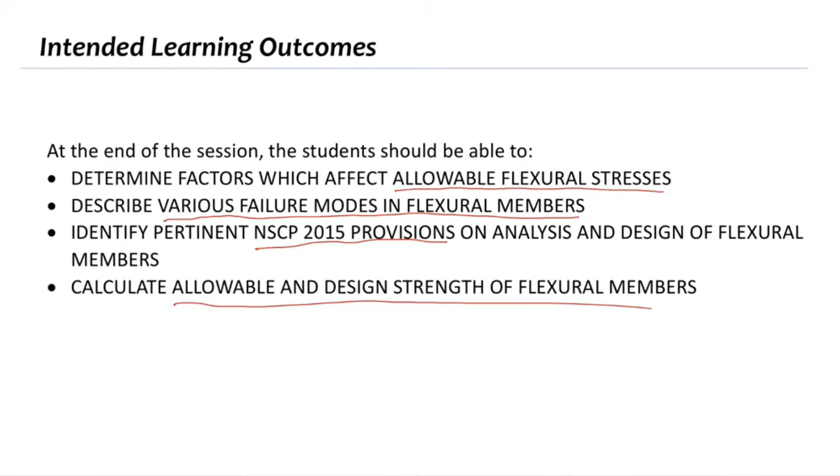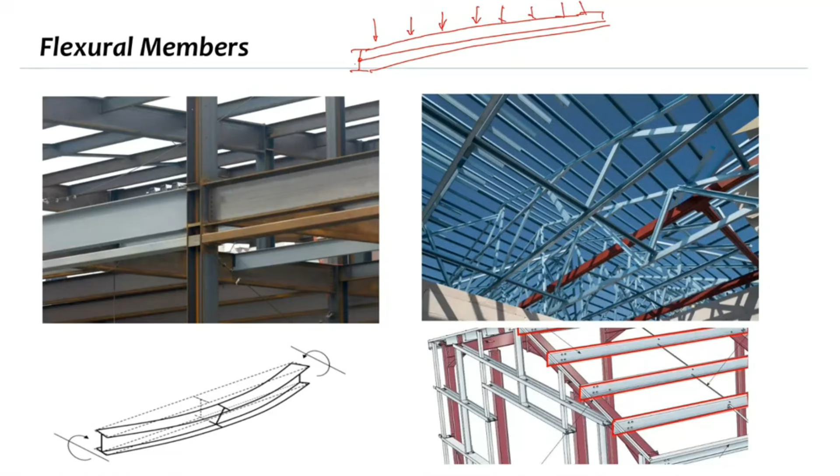Flexural members are members that carry gravity or downward loading along its longitudinal axis. So if this is our member, an I-section, and that is the longitudinal axis, it carries downward loading along its longitudinal axis. Because of that loading, we have bending - our element bends, which causes what we call internal moment. So because of the downward or gravity loading along its longitudinal axis, we get internal moment.

That is why when we have a beam, we have what is called a moment diagram, especially if the element is carrying gravity loads along its longitudinal axis. At any point of this beam, if I cut a section here, I will see an internal moment - we have an internal moment being carried. Usually, when simply supported, the compression is at the top and tension at the bottom. So that is a common analysis of a flexural member.

So what are those flexural members? Of course, the main example is the beam, because our beams are actually carrying gravity loading coming from our slab. So coming from the slab, going to the beam, our beam carries gravity loading, and because of that gravity loading, our beams bend.

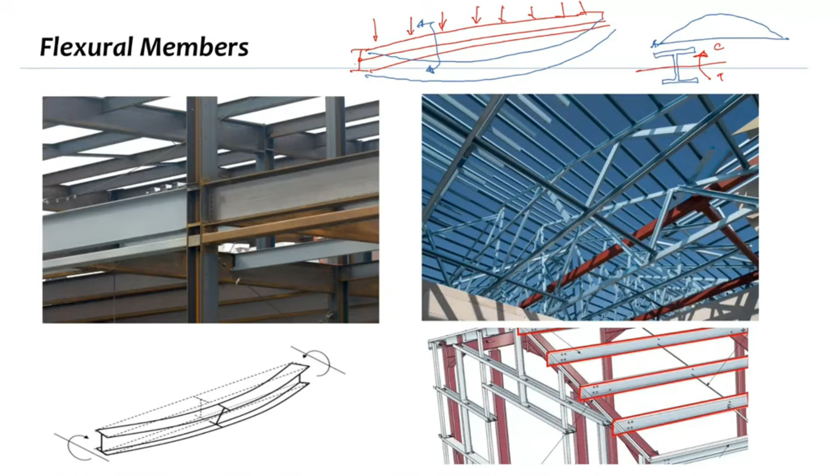Another example of our flexural members is our purlins. Purlin is commonly designed as a flexural member. Maybe it's not obvious, but what is that? That is also a flexural member, because if we look at our purlin, which supports the roof sheets, when it carries wind load or any loading, the load is actually perpendicular to its longitudinal axis. That will cause bending as well, so there's also bending when it comes to our purlins.

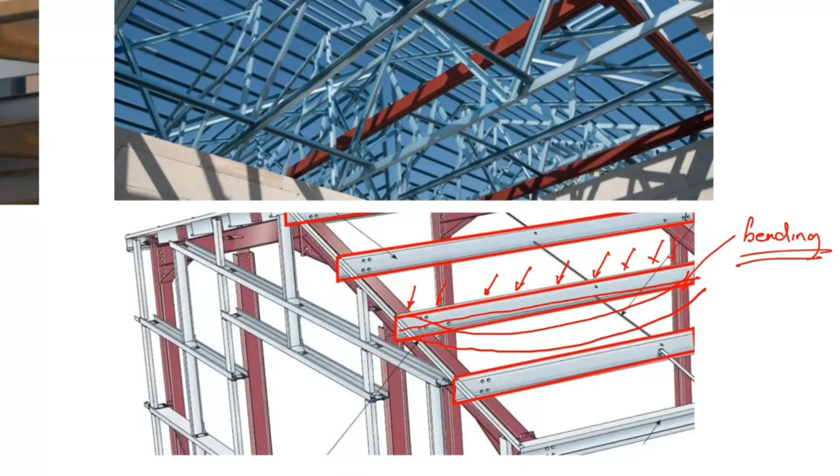But beams are the most common example of a flexural member, because when we are designing a building, that is the main flexural member element we design. These are structural elements that carry gravity or vertical loads subjected to primary flexure or bending, and they are typically oriented horizontally - our element is horizontal so it can carry gravity load. So the common sections used in our beams are wide flange or W shapes.

But sometimes channels or built-up members are also used, especially for small structures like a one-story parking garage. We can also use purlins there, but the orientation of our purlins should actually be standing, because when our purlins are standing, the moment of inertia is larger, giving greater resistance to bending.

As we discussed, the higher the moment of inertia, as the moment of inertia increases, the higher the resistance to bending. The higher the moment of inertia, the higher our resistance. But sometimes we can also use built-up shapes, if we are limited on the size of the elements. Built-up sections are used when we want to increase the strength of a member without really changing the size of the elements or the size of the member.

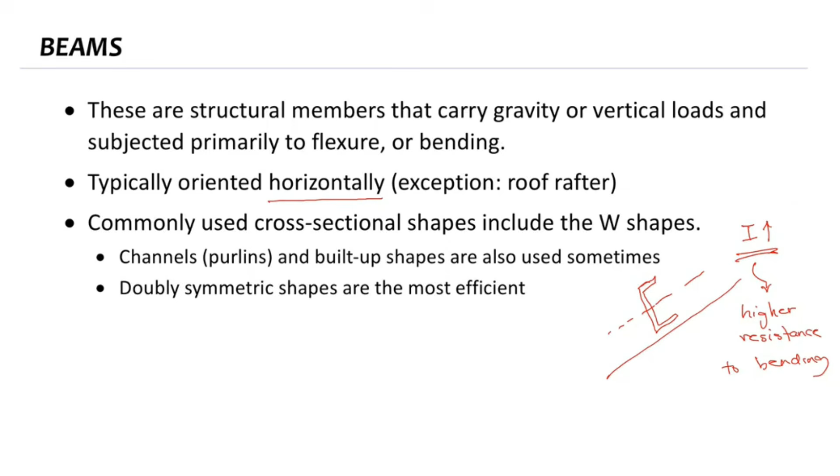Doubly symmetric shapes are the most efficient because, being symmetrical shapes, we already know that the principal axis or major axis will be along the x or y axis. That's why we commonly use I-shapes, because they are doubly symmetric shapes.

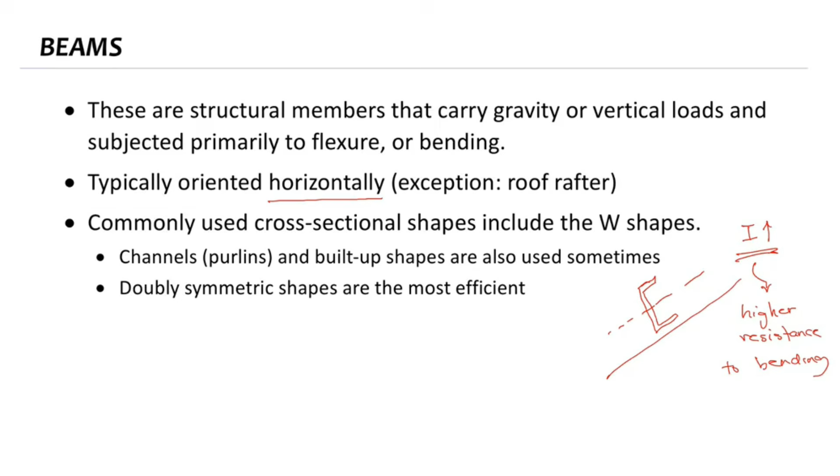If we want to calculate the bending stress of our flexure members, we use a simple formula from mechanics: MC over I, where M is the moment applied, C is the distance from the neutral axis to the extreme fiber, or the distance from the neutral axis to the point in question, and I is the moment of inertia.

But we already established in lecture number 1 that our section modulus, or Sx, is equal to I over C. That is why we can also define the bending stress as equal to M over S, or the applied moment divided by the section modulus, where S is the section modulus.

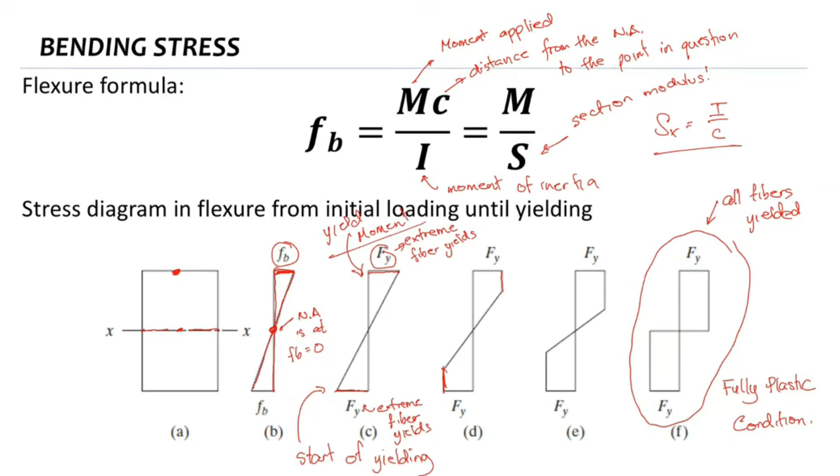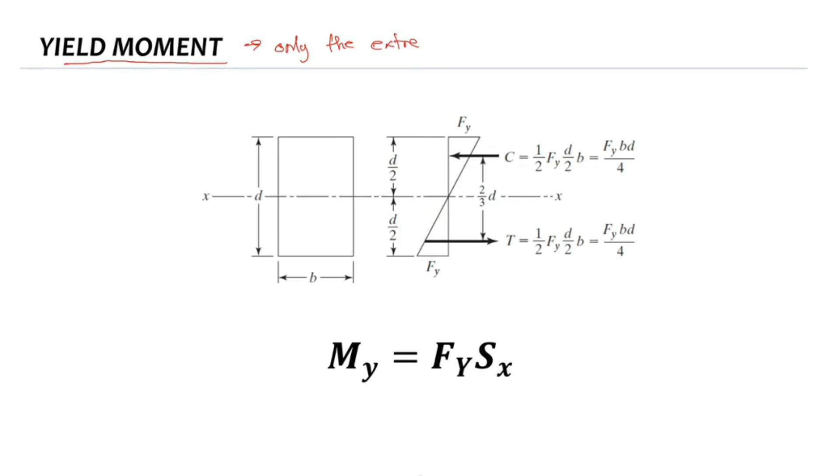So if we look at the yield moment, to calculate the yield moment capacity, this is where the yield moment happens—when only the extreme fiber has yielded. If we look at the stress distribution, it will be triangular.

We have a triangular stress distribution, with compression at the top and tension at the bottom, because only the extreme fiber yielded. If we calculate the compression force, it will be the volume of the stress diagram, which is a triangle—that is 1/2 times the stress Fy times the area, where the area is half of the section, BD over 2.

The same applies on the other side. This gives us Fy times BD over 4. Similarly at the bottom, since compression equals tension, the bottom will also be Fy times BD over 4.

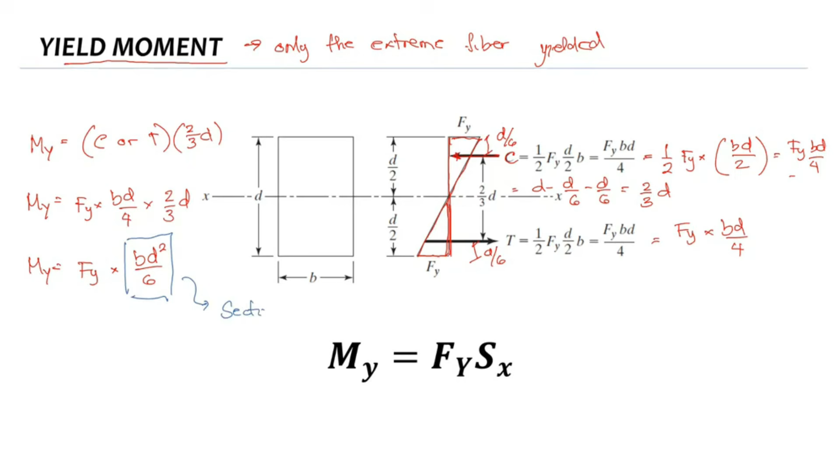This BD squared over 6 is actually our section modulus, the elastic section modulus. The elastic section modulus Sx is just equal to I over C, where I, the moment of inertia of a rectangle, is just BD cubed over 12. So that is BD cubed over 12 divided by C, which is D over 2. This will be BD squared over 6. So they are the same, parehas lang.

So basically, we don't have to do the force analysis when we want to determine the yield moment. If we want to determine the yield moment, we just multiply the yield stress with the elastic section modulus. To get the yield moment, you just multiply Fy by Sx. That is the yield moment.

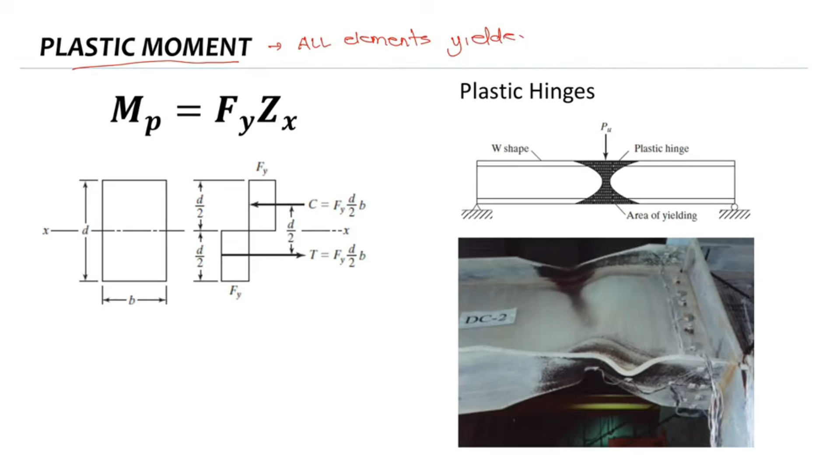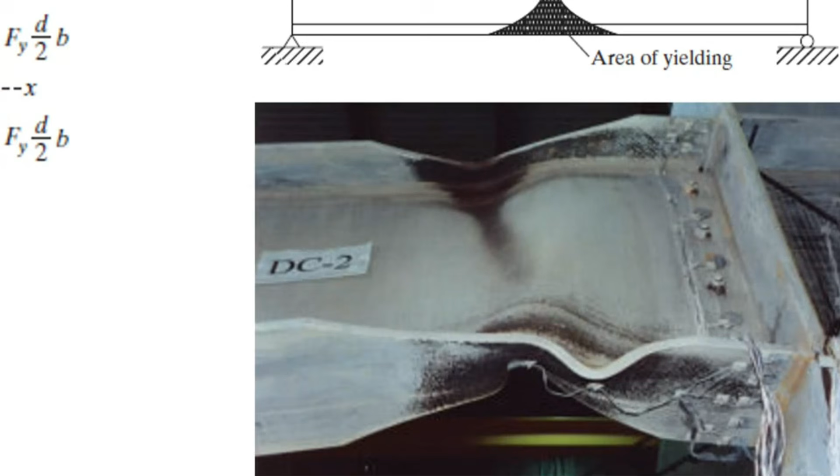On the other hand, if we look at the plastic moment, when we say plastic moment, all the elements already yielded, all elements or fibers already yielded. When all the elements or fibers have yielded, that is what we call the full plastic condition. So when we have full plastic condition, this is what it looks like, not just the extreme fiber yielded, but all fibers along the depth already yielded.

So in full plastic condition, all the stress is not linearly varying anymore, unlike in yield moment. In plastic moment, it is now constant stress of Fy, because everything has already yielded. We have a constant stress of Fy.

So in such cases, if we are going to do a force analysis, the compression will be just the stress times the area. The area now is no longer a triangle, it's a rectangle. So the compression is just equal to Fy times the area of half of the rectangle, that will be BD over 2. It's also equal to the tension, and the location of the force will be at 1/2 of D over 2, so that will be D over 4 on each side. So the distance between compression and tension will be D over 2.

To calculate for the plastic moment, same as what we did earlier, compression or tension multiplied by the distance between the forces. So the plastic moment is equal to compression or tension times the distance between them, that's D over 2. So the plastic moment equals Fy times BD over 2 times D over 2, which gives us Fy times BD squared over 4.

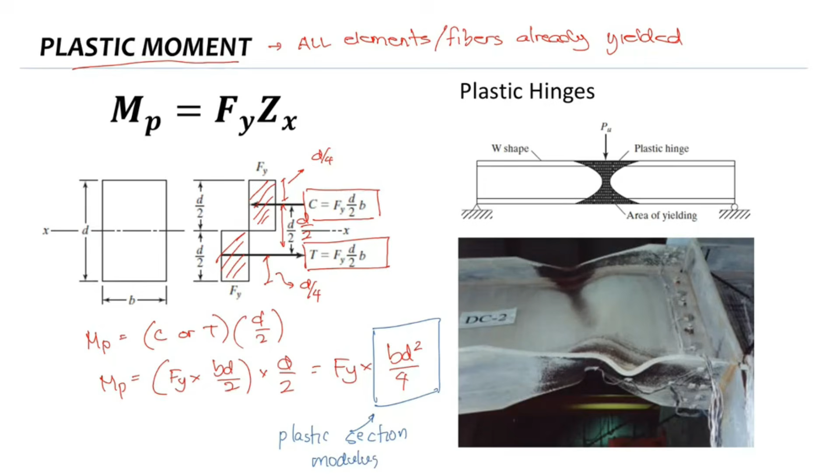So earlier we called it elastic section modulus. This time, this is what we call the plastic section modulus. Earlier, for the elastic moment or yield moment, our designation was Sx. This time, our designation is Zx, the plastic section modulus.

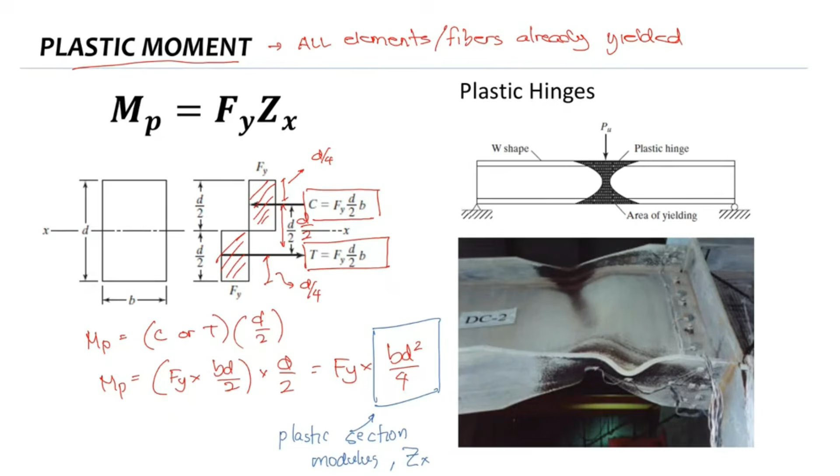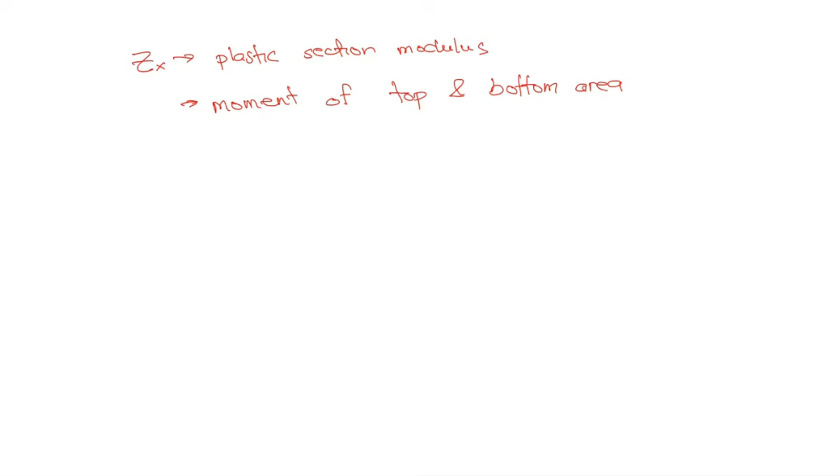So what is the plastic section modulus? Plastic section modulus is actually the moment of area of the top and bottom about the plastic neutral axis. Let's discuss what plastic section modulus is. Plastic section modulus or Zx, that is what we call the plastic section modulus. It's actually the moment of top and bottom area - not just one part, but top and bottom - moment of top and bottom area about the plastic neutral axis.

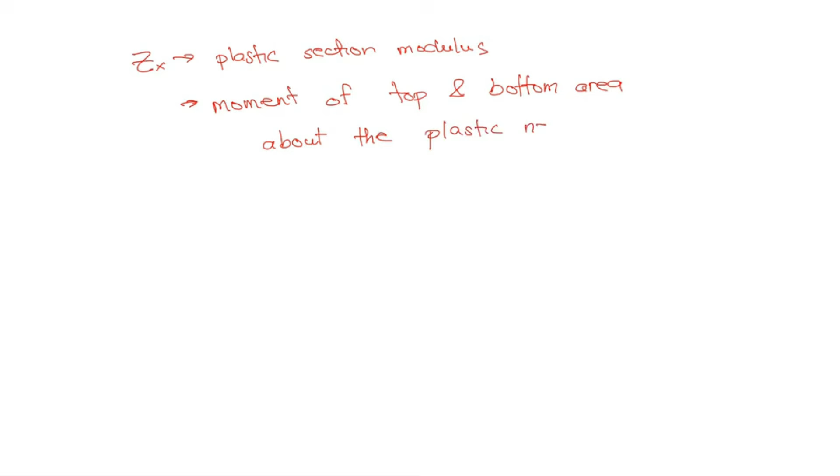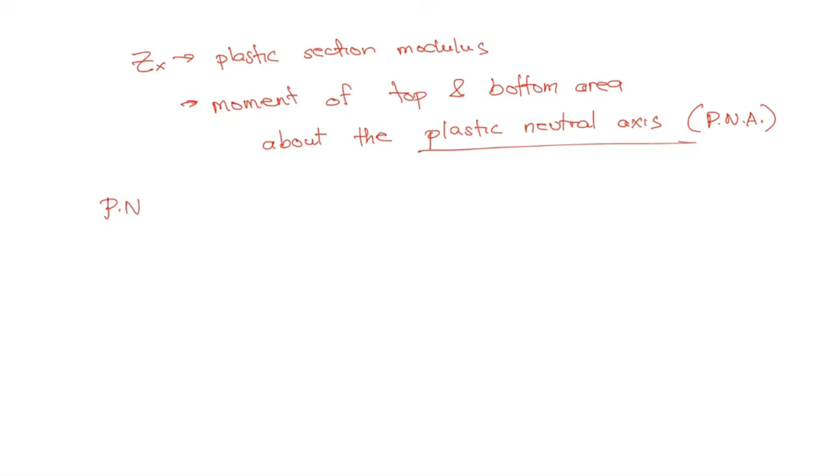Or yung tinatawag natin na PNA, plastic neutral axis. Ano naman yung plastic neutral axis? Basically, ang plastic neutral axis is actually the division of the compression and tension zone.

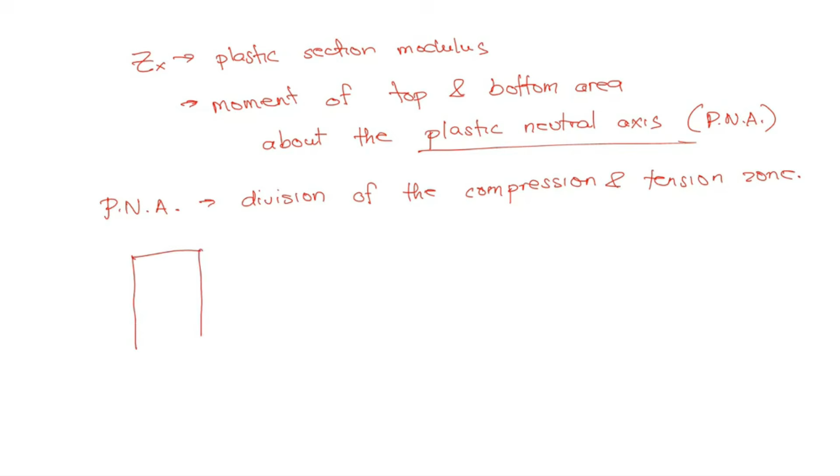This is actually the neutral axis that you are considering when you are calculating a reinforced concrete problem. Sa reinforced concrete, kung meron kang section na may steel sa ilalim, meron kang compression sa top, tension at the bottom, tapos kinukuha mo yung depth C, yan daw po yung neutral axis. So, the neutral axis sa RC, yan din yung neutral axis natin sa steel. Basically, that is the division of the compression and tension zone.

Kapag na-consider naman natin ang steel element, let's say this is our steel element, then the division of the compression and tension zone, this is compression, this is tension, ito po yung neutral axis natin. That is still the neutral axis. So para ma-locate natin yung neutral axis, what we can do is equate compression is equal to tension.

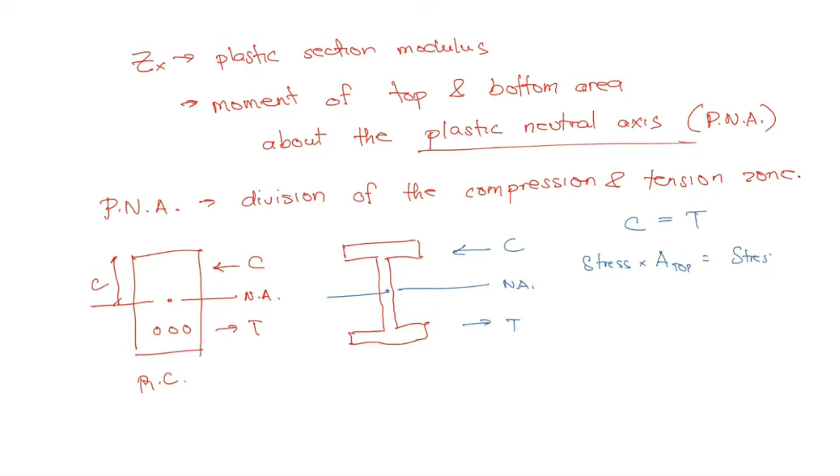Ganyan din yung ginawa natin sa RCD. If we equate compression is equal to tension, then that will be the stress times the area. Stress times area top is equal to stress times area bottom. Pero yung stress natin, dahil plastic siya, ang stress natin Fy. So Fy times area top is equal to Fy times area bottom, kasi parehas po yung steel sa top and bottom. So in that case, magka-cancel po yung ating Fy kasi parehas lang naman sila. So that means area top is equal to area bottom.

So for steel design, the location of the plastic neutral axis is actually the division of the top and bottom area that will make it an equal area. So we can add another definition for plastic neutral axis: for steel design, or basically for steel with uniform Fy, the plastic neutral axis is just basically the axis that divides the area into two equal areas.

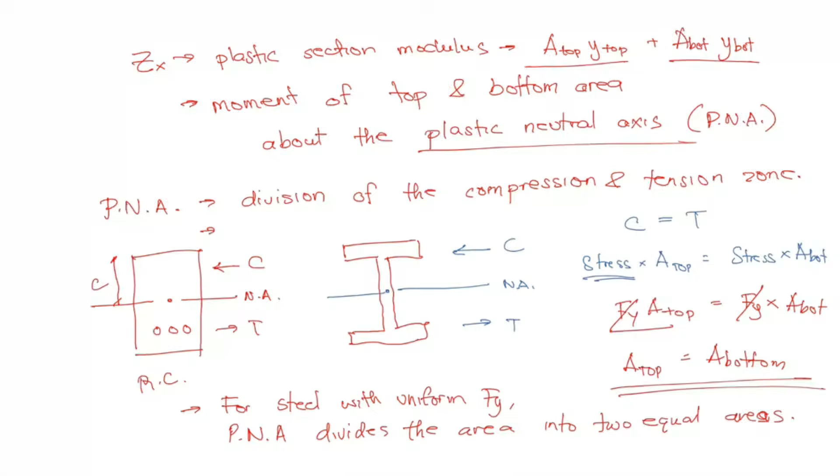So, shape factor is the ratio between the plastic moment and the yield moment. Again, shape factor is the ratio of plastic moment MP and yield moment My. We already established that the yield moment is equal to Fy times Sx, and the plastic moment is Fy times Zx. So to calculate for the shape factor, it's just equal to the plastic moment over the yield moment. Since they're both Fy, magka-cancel po yung Fy natin, that will be Fy Zx over Fy Sx. Cancel Fy, shape factor is just equal to Zx over Sx.

So what does the shape factor tell us? Pagka shape factor po, let's say the shape factor is always greater than 1. So let's say the shape factor is 1.5. That means after yielding, at the start of yielding, it can yield 50% more before it reaches full plastic condition. Yun yung sinasabi ng shape factor. So let's say, for example, the shape factor is 1.5, then after yielding, once it starts yielding, it will yield 50% more before it reaches full plastic condition. That is what we call the shape factor.

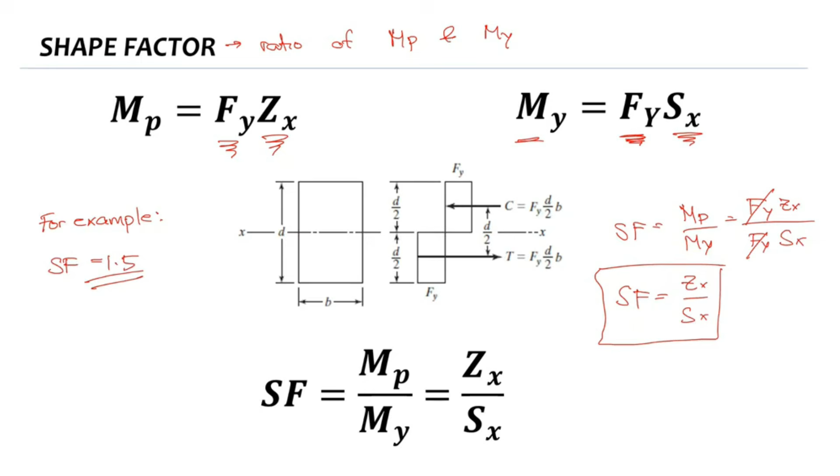Shape factor is always greater than 1 since plastic moment is greater than the yield moment. Yung plastic moment natin is greater than the yield moment. So dahil mas malaki yung numerator with respect to the denominator, then it should be greater than 1.

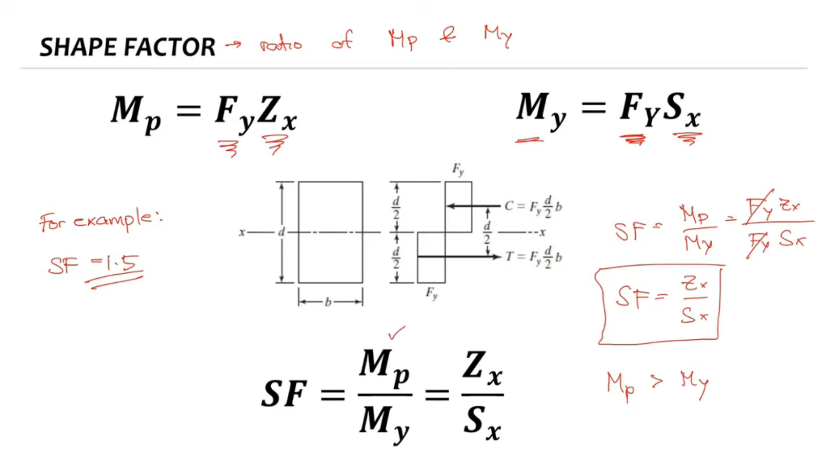Now let's apply the concept to a simple example. We have to calculate the elastic section modulus and the plastic section modulus, as well as the shape factor.

Letter A, we have a rectangular section with a base of 50 and a depth of 200 millimeter.

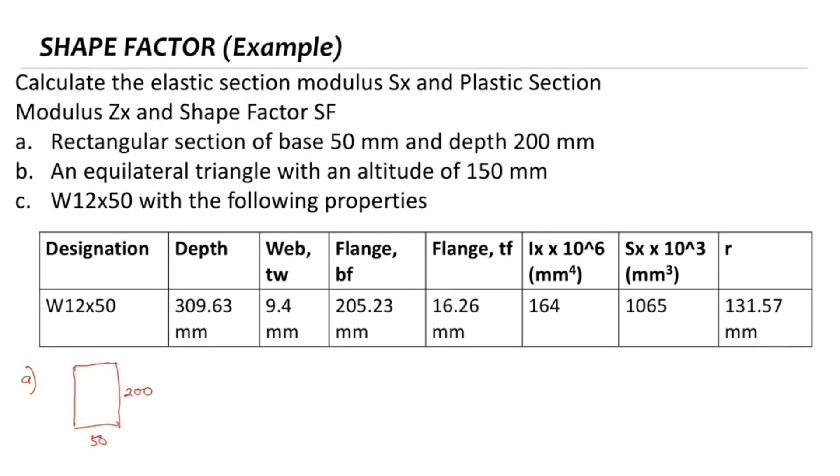If I want to calculate the section modulus Sx, section modulus is equal to Ix divided by C. Our Ix is the base 50, height 200 cubed, over 12, divided by the distance from the extreme fiber, distance C, which is 200 over 2. So what is Sx? That is 333.333 times 10 raised to 3 millimeter cube. So this is our Sx.

To solve for the plastic neutral axis or the plastic section modulus Zx, take note that for a symmetrical section - meaning a section we can fold - the centroid and the plastic neutral axis coincide with each other. The plastic neutral axis, PNA, is at center. So when the section is symmetrical, the plastic neutral axis is just at the center. If it can be folded, then the PNA will be at the center. So for this rectangular section, we don't have to worry because this is a symmetrical section, so the plastic neutral axis is at the center.

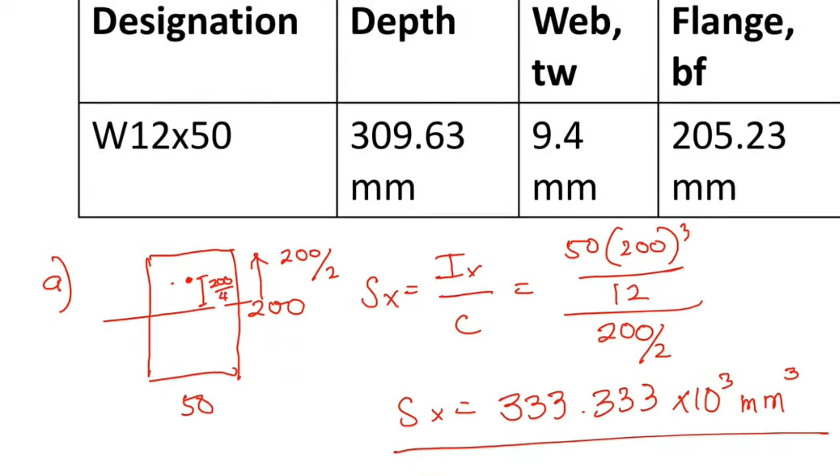So to solve for Zx, we just have to take the moment: area top times y top, plus area bottom times y bottom. Our area top will be 50 times 200 over 2. How far is the centroid of y top from the plastic neutral axis? That is 200 over 4. So times 200 over 4. And since the top is equal to the bottom, I'm just going to multiply this by 2, because the top and bottom are actually equal. So I can now calculate for Zx. What is our Zx? 500.

Solving for the shape factor for the rectangular section, the shape factor is equal to Zx over Sx. That is equal to 500 times 10 raised to 3 divided by 333.33 times 10 raised to 3. What is our shape factor? 1.5. The shape factor is now 1.5.

Next, for an equilateral triangle with an altitude of 150 millimeter. So letter B, we have an equilateral triangle, meaning all sides are equal, with an altitude or height of 150 millimeter. Since this is an equilateral triangle, this is also equiangular, so each angle is 60 degrees.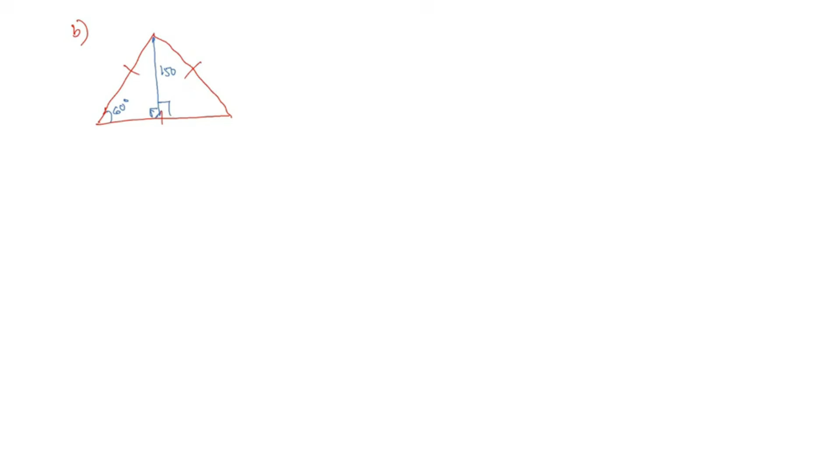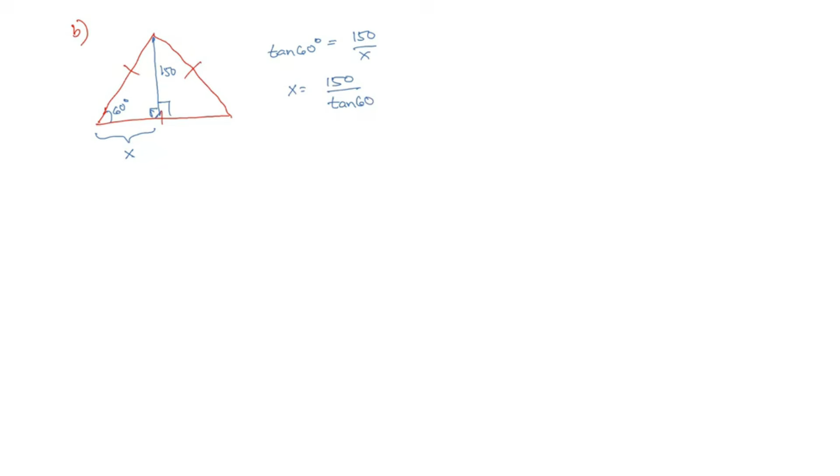To get the base, let's say this distance is x. Tangent of 60 degrees is equal to 150 over x, so x will be equal to 150 over tangent 60. But since there are two of these, 2x, our base is equal to 2x, which is 300 over tangent 60.

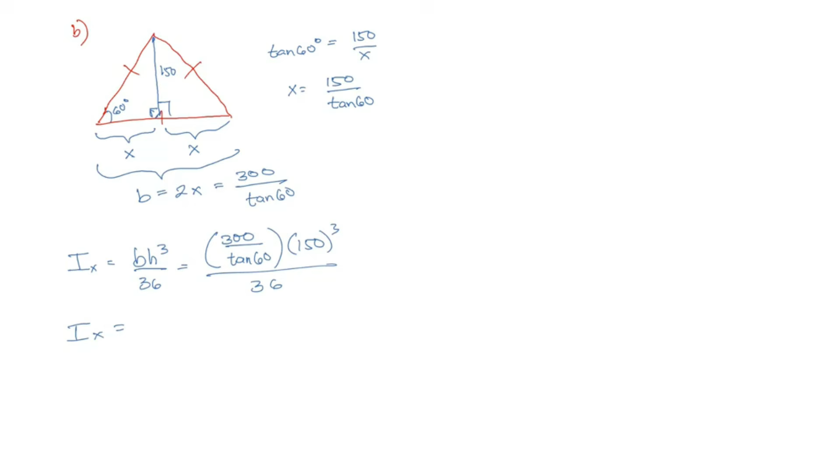So in solving the moment of inertia, it will be bh cubed over 36. Ix will be equal to bh cubed over 36. Our base is 300 over tangent 60, our height is 150 cubed, over 36. That will be our Ix. What is our Ix? 16.238 times 10 raised to 6 millimeter to the fourth.

Calculating for Sx is equal to Ix over C. Our C, coming from the elastic neutral axis, is 2/3 of the depth. So that is 16.238 times 10 raised to 6 divided by 2/3 of the depth, 150. What is our Sx? The result is the same, because it's 100. So that is 162.38 times 10 raised to 3 millimeter cube.

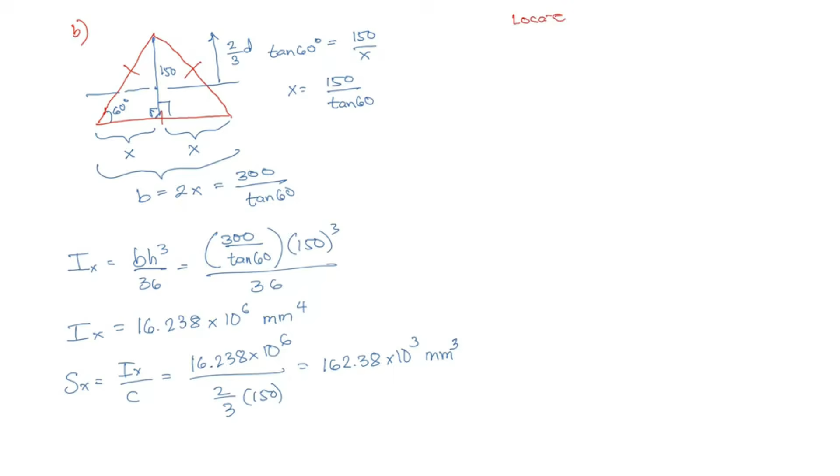To solve for the plastic section modulus, we have to locate the plastic neutral axis. But this time, the plastic neutral axis is not at the center because this is an unsymmetrical section. So we have to locate the plastic neutral axis by equating the top and bottom areas.

So let's say the location of the plastic neutral axis is at depth y, and this is z. To locate the plastic neutral axis, recall that it divides the section into two equal areas. So to solve for y, area top will just be equal to area bottom. Area top natin, that will be equal to 1 half...

z times y is equal to the area bottom. Ang area bottom natin is the area of the trapezoid, no? This is a trapezoid section. But the base is actually 300 over tangent 60, and the depth is now equal to 150 minus y. So we can calculate the area of a trapezoid: 1 half, B1 plus B2, average of the bases, times the height. So that will be 1 half.

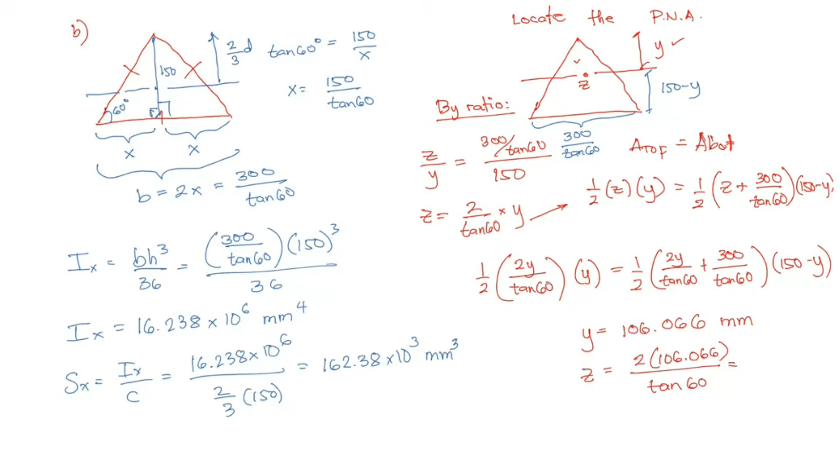With this, I can also calculate for z. The z value will be 2 times 106.066 divided by tangent 60. That is equal to ilan? 122.474.

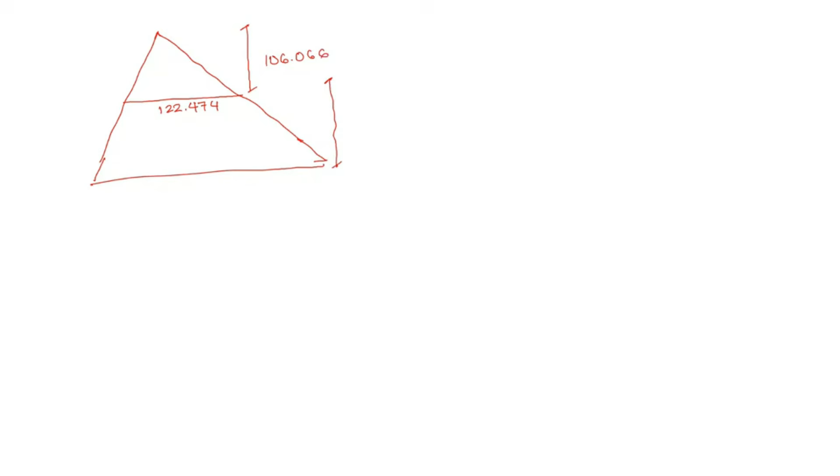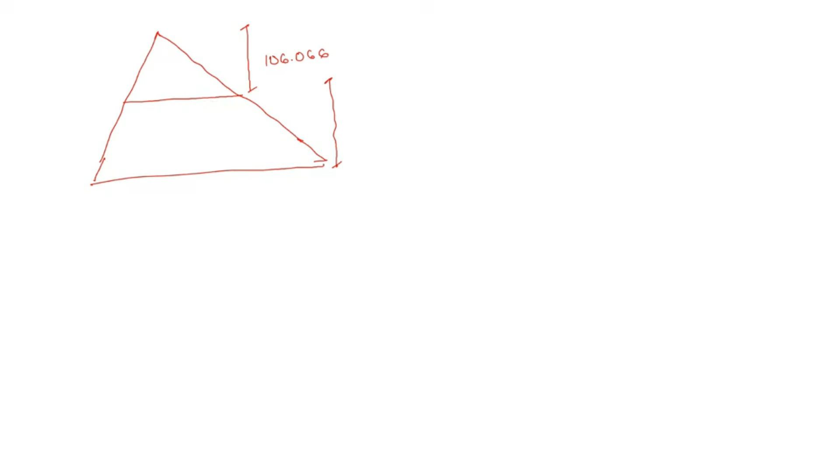122.474. So with this, I can calculate for the plastic section modulus. So the base is actually equal to 122.474, and the height is actually equal to 106.066. So for this one, that is actually equal to 150, or we can just stick with the variable and substitute later on, kasi may mga value naman na tayo. So this is z, this is y, this is 150 minus y, this is 300 over tangent 60.

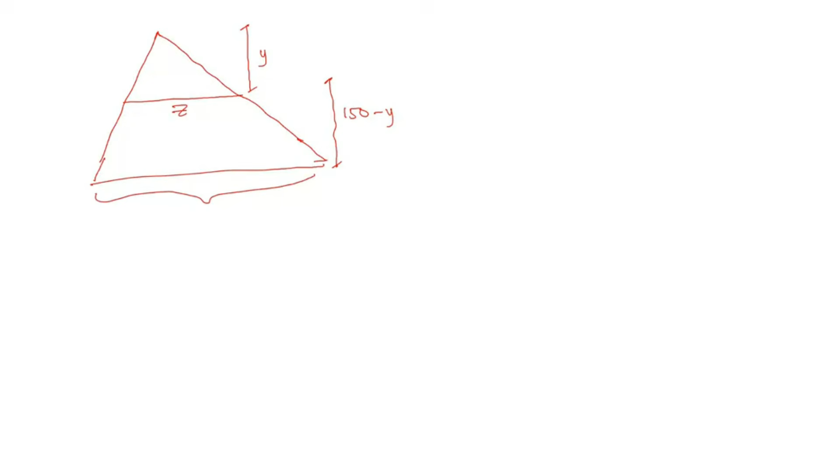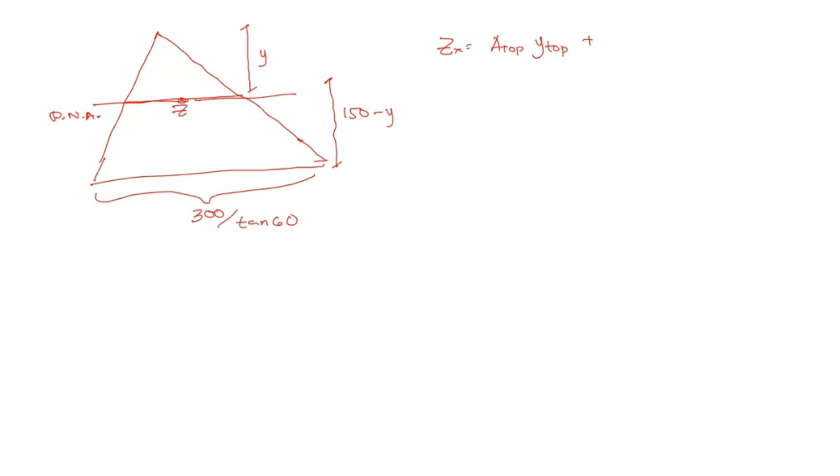So we are going to take the moment from the plastic neutral axis. Let's say this is the plastic neutral axis. So i-moment lang natin. So Zx is equal to area top, y top, plus area bottom, y bottom. Ang area top natin, that is equal to the triangle, that is 1 half z times...

1 half z times y, times the distance, that is y over 3. That is the moment of area for the top.

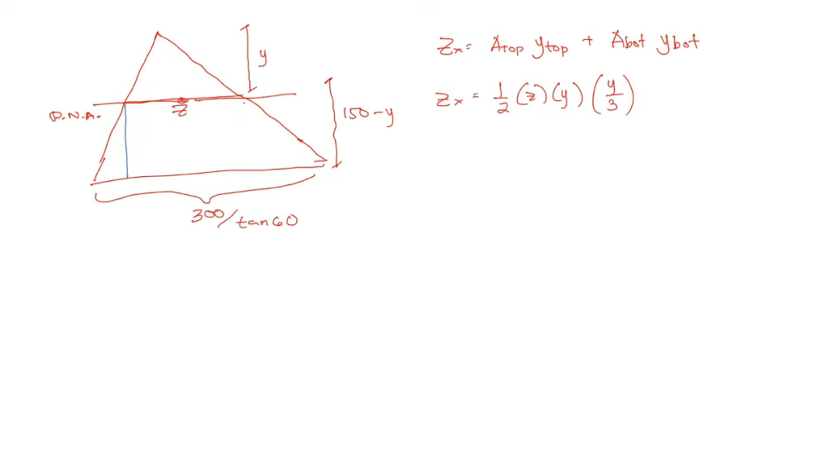And then for the area bottom, hatiin natin siya sa dalawa, gagawin nating isang rectangle saka triangle, isang area 1 saka area 2. So plus yung area 1, the rectangle, that will be base z, times height 150 minus y. That is the area, z times 150 minus y, and then the distance, that will be 150 minus y divided by 2.

Plus area 2, area ng triangle, 1 half. Ang base natin will be 300 over tangent 60 minus z, that is the base. Ang height natin, 150 minus y. Tapos yung distance from the neutral axis, that will be 2/3 of 150 minus y. Okay? Then you can now calculate for Zx.

Substitute the value. Ang Z natin, the Z is equal to 122.474. And then yung Y natin, Y is equal to 106.066. Can you solve for Zx?

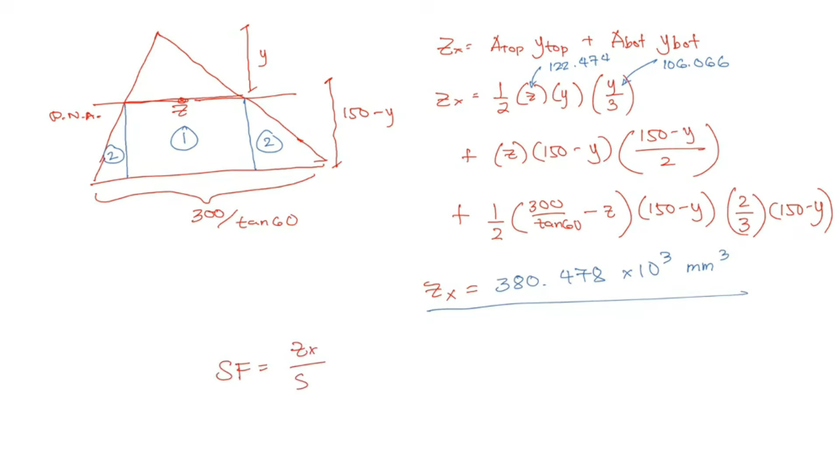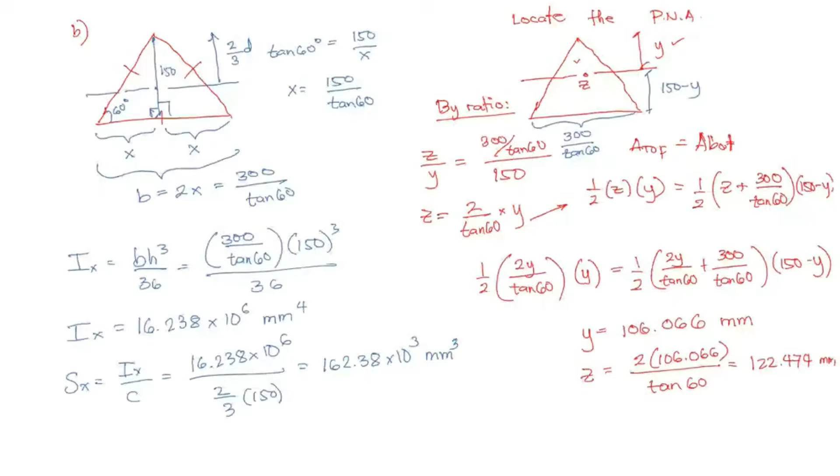After solving for Zx, we can now calculate for the shape factor. Ang shape factor natin is equal to Zx over Sx. That is 380.478 times 10 raised to 3 over Sx, that is 162.38 times 10 raised to 3. What's the shape factor? 2.34.

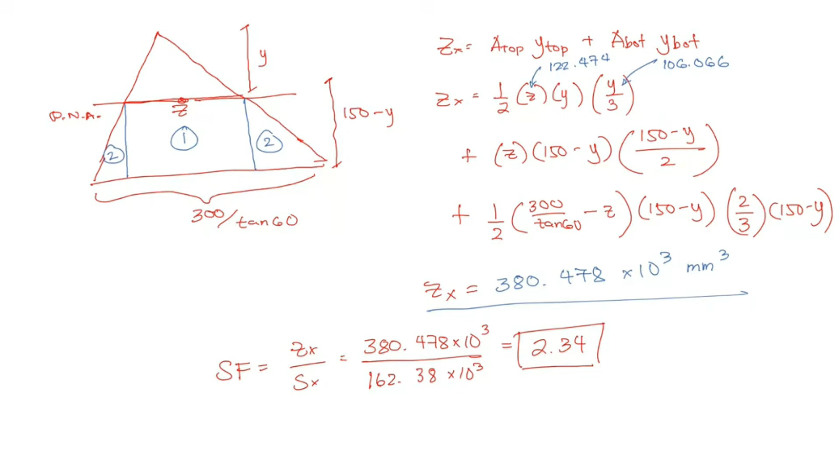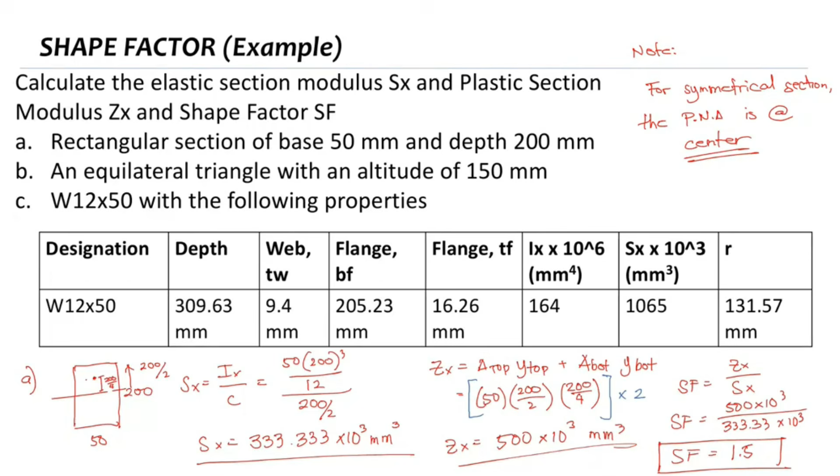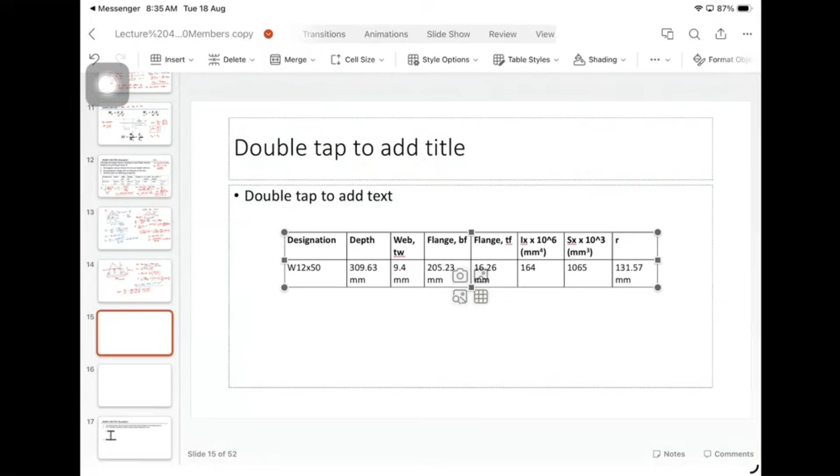Okay, so that is for the equilateral triangle. Lastly, let's try to solve for the W12 by 50. For the W12 by 50, we have the following properties. So to solve for it, let me copy this. For the next one, we have a W12 by 50. We already have the dimension and we already have the Sx. So ang isolve na lang natin Zx. We just have to solve for Zx.

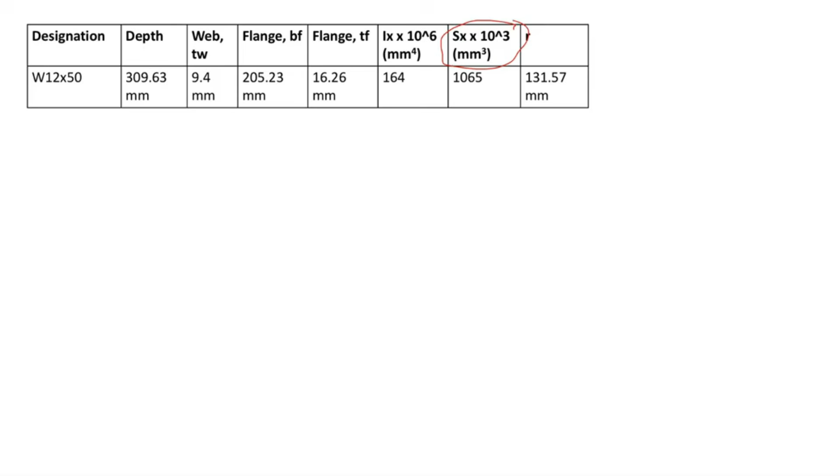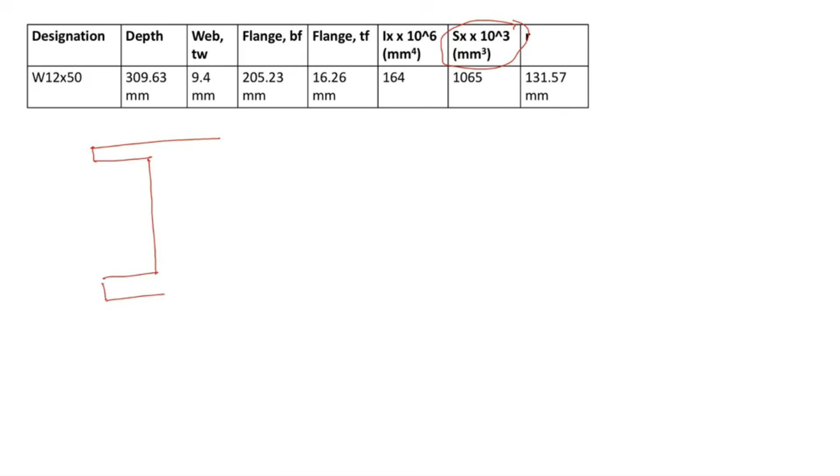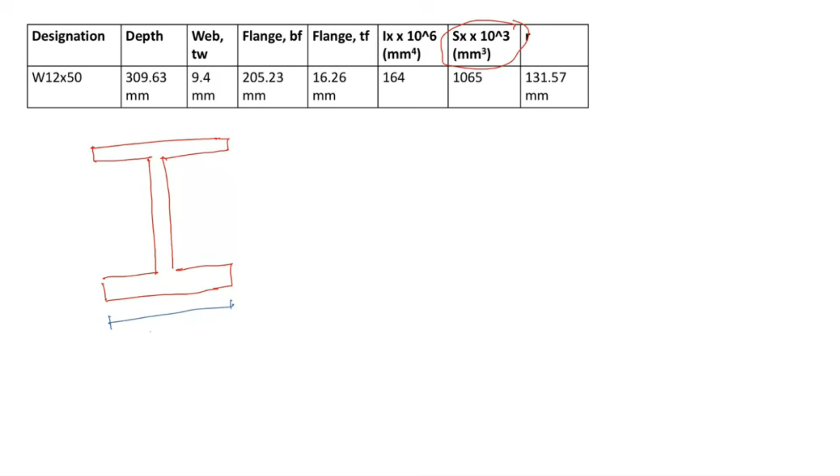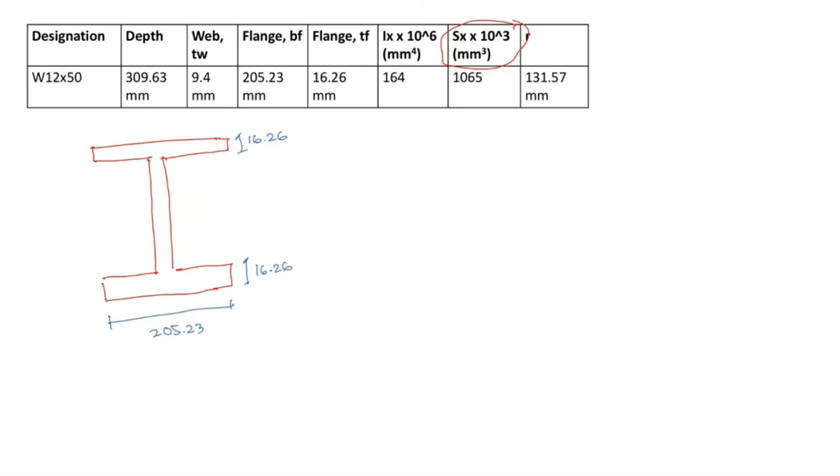So to solve for Zx manually, let me just draw the I section. Drawing natin yung I section. And the base or the flange width is 205.23. The thickness of the flange is actually 16.26. And the total depth is 309.63. So I can now determine the depth of the web. Let's say this one, H, that is equal to 309.63 minus 2 times 16.26. Ilan po ito? 277.11.

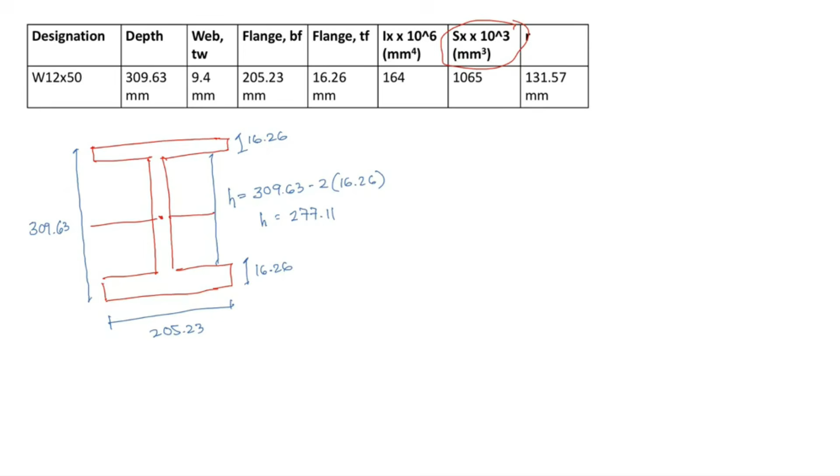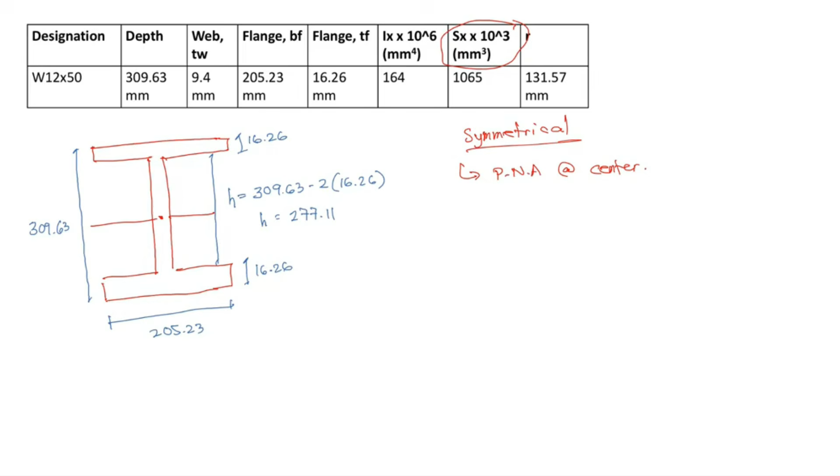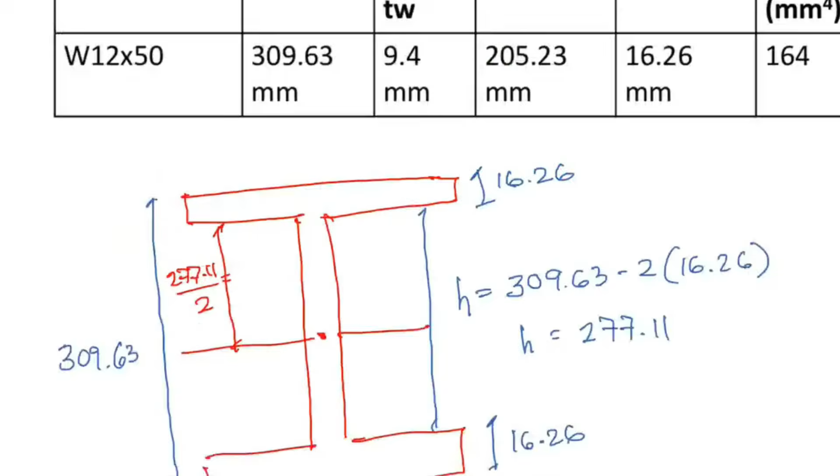So if I'm going to calculate for the plastic section modulus, since this is a symmetrical section, then the plastic neutral axis will be at center. Nasa gitna lang yan, no? Plastic neutral axis at center kasi symmetrical po siya. So I can just take the moment of the top and bottom. So I could also determine this. Can you get me this? 277.11 divided by 2, that is 138.555. So to calculate for Zx will just be equal to area top, Y top, plus area bottom, Y bottom.

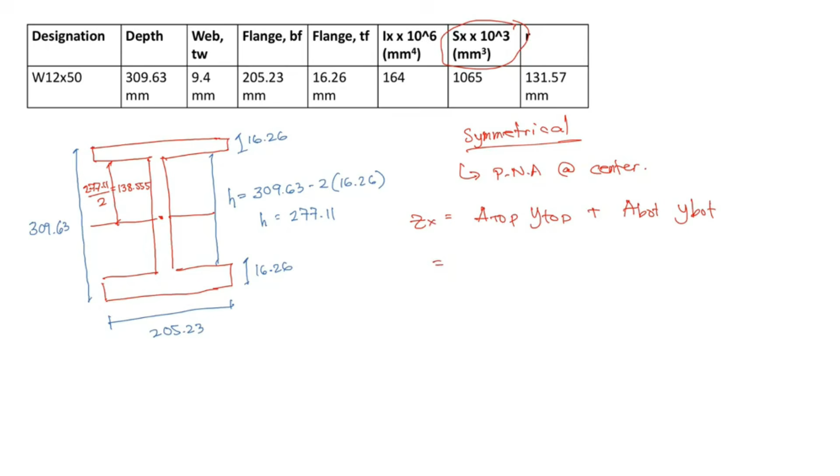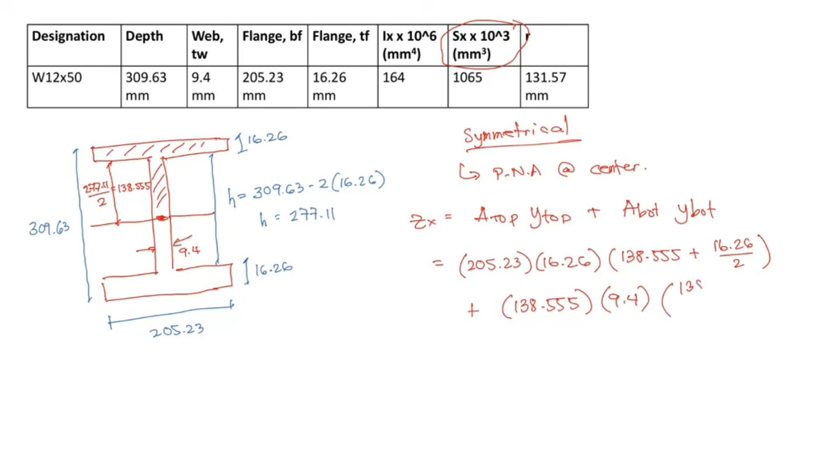Ang area top natin, flange muna for this one, that is 205.23 times 16.26 times y top, gaano siya kalayo sa plastic neutral axis? That is 138.555 plus kalahati ng 16, plus the web part. So that is 138.555 times the thickness of the web. Thickness of the web is 9.4, times 9.4, gaano siya kalayo sa plastic neutral axis? That is 138.555 over 2.

And then, since area top is equal to area bottom, itatimes 2 ko na lang. All of this multiply by 2. So that is your Zx. Times 2 na lang natin because the area top is just equal to area bottom. So the plastic section modulus is now equal to 1159.444 times 10 raised to 3 millimeter cube.

With the plastic section modulus, we can now calculate for the shape factor. Calculating for the shape factor, that is Zx over Sx, 1159.444 times 10 raised to 3 divided by 1065 times 10 raised to 3. Ilan po yung shape factor? 1.09.

So that's how we calculate the plastic section modulus manually on a standard section. The principle is still the same. You just have to take the moment, the top and bottom area moment, from the plastic neutral axis. Okay?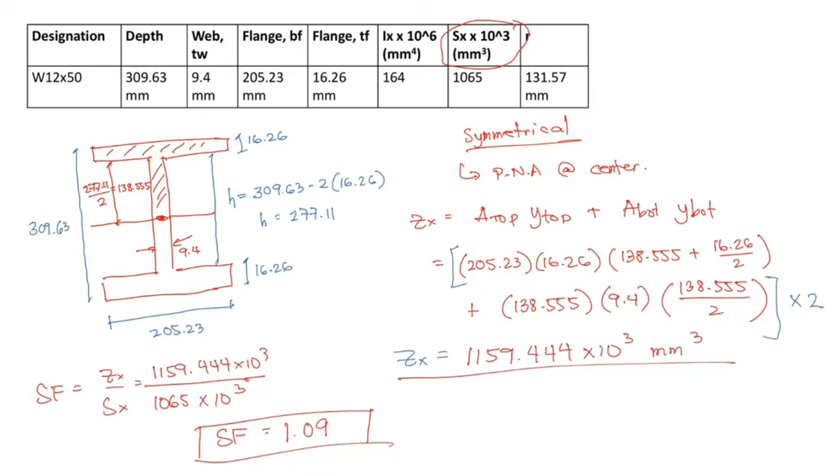Okay, let's now try to solve this problem. An unsymmetrical flexural member consists of 3 inches top flange and 3 inches bottom flange, and 1/2 inch and 66 inches web. Determine the distance from the top of the shape to the horizontal plastic neutral axis. So meron daw tayong top flange 3 inches by 22 inches. So we have a top flange of 3 inches by 22 inches. So this is 22, this is 3 inches.

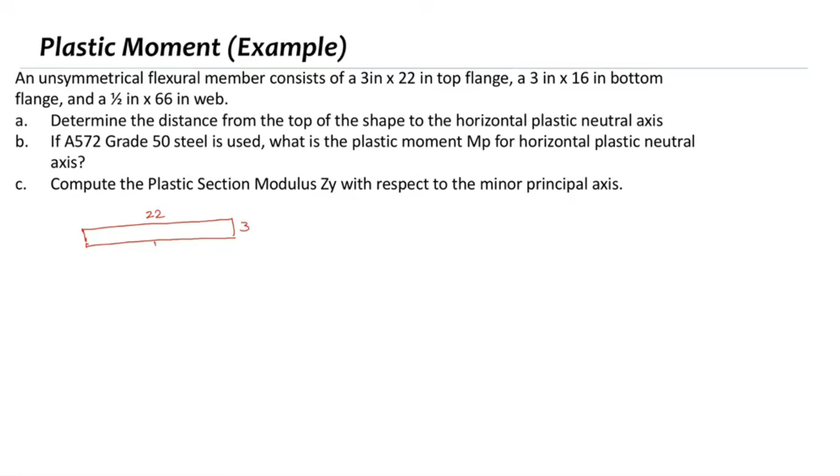And we have a web of 66 by 1/2. This is 66 and the thickness is 0.5. And the bottom flange is actually equal to 3 inches by 16 inches. So that is 16 by 3. So the question is, what is the distance from the top of the shape to the horizontal plastic neutral axis?

Again, this is an unsymmetric section. So kapag unsymmetric, we have to locate the neutral axis. Locate natin yung plastic neutral axis. To locate for plastic neutral axis, we just have to equate top and bottom. So let me designate this as, let's say, Z value. So if that is Z, this will be 66 minus Z.

So to locate the plastic neutral axis, gagawin lang natin, area top is equal to area bottom. Ang area top natin, that is 22 times 3 plus Z times 0.5, is equal to area bottom, that is 16 times 3 plus 66 minus Z times 0.5. What is the Z value?

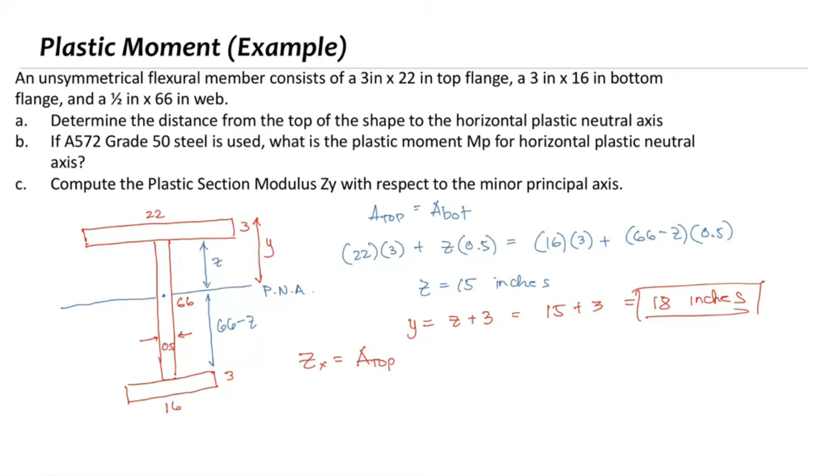Distance from the top of the shape to the horizontal plastic neutral axis. And to calculate for the plastic section modulus, Zx, that is area top times y top, plus area bottom times y bottom.

Our area top, that is 22 times 3. How far is it from the plastic neutral axis? That will be 15 plus 3 over 2, plus z, which is 15. This is already 15. 15 times 0.5 times 15 over 2, plus 66 minus 15, that will be 51.

51. So area 3, that will be 51 times 0.5 times 51 over 2, plus area 4, 16 times 3. The division of the area: this will be area 1, area 2, area 3, and area 4. Area 4, 16 times 3 times distance, which is 51 plus 3 over 2. That is my Zx. What is our Zx?

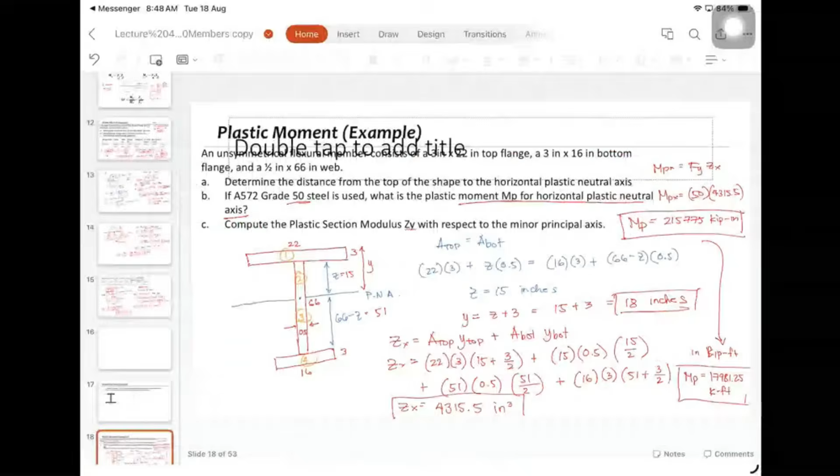For the minor principal axis, that means the section is lying down. So if I'm going to rotate it, rotated. This is still 22, this is 3, this is 66, this is 0.5, and this is 16, this is 3.

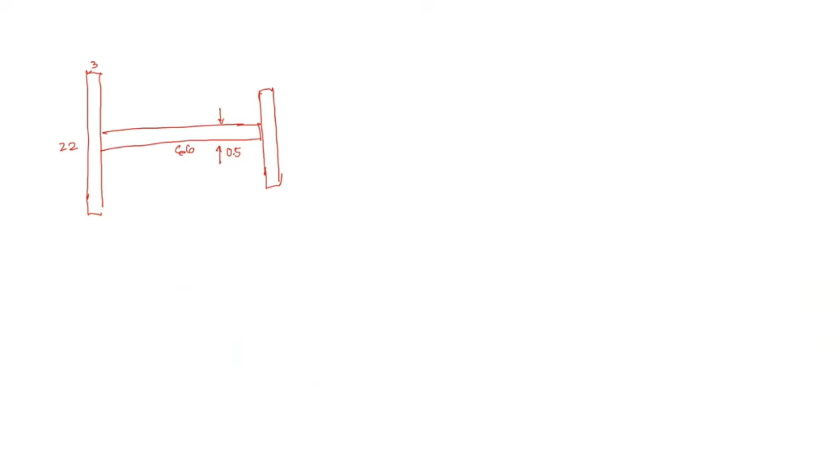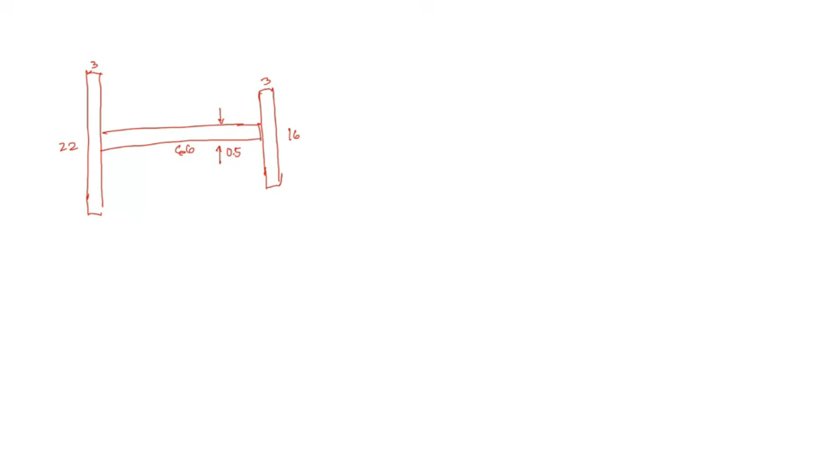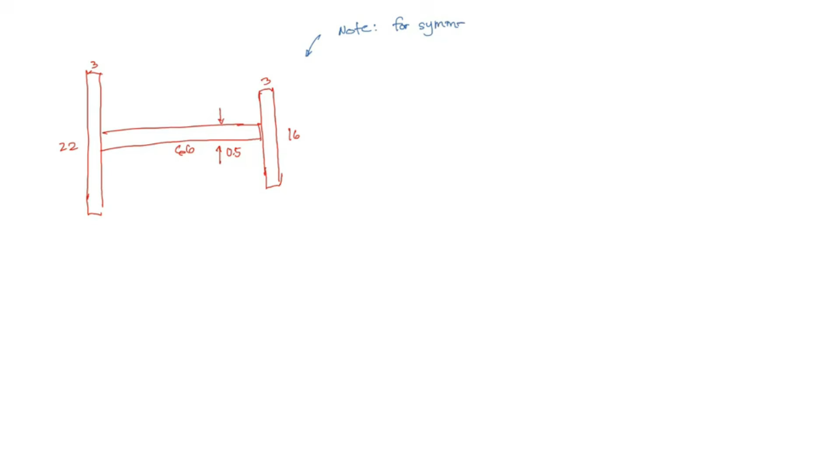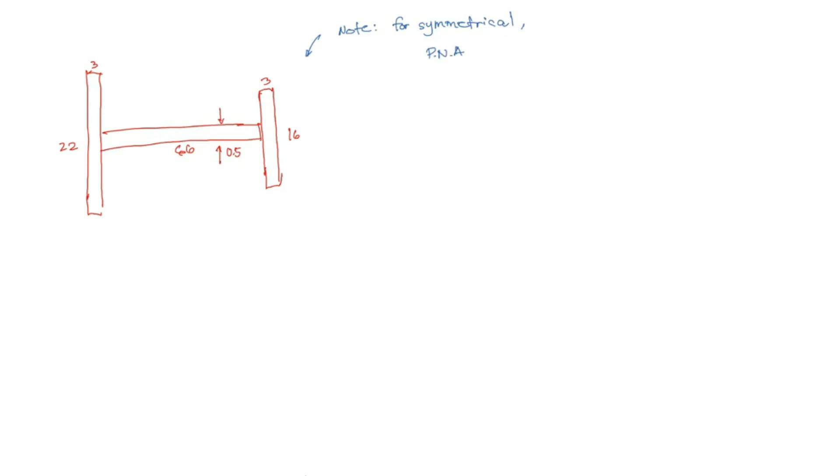So when the section is lying down, basically if you try to fold it, this is symmetrical. Note: for a symmetrical section, because it's now lying down, it's symmetrical with respect to the horizontal axis. So for symmetrical sections, the plastic neutral axis is at center. It's in the middle, so we don't have to locate it.

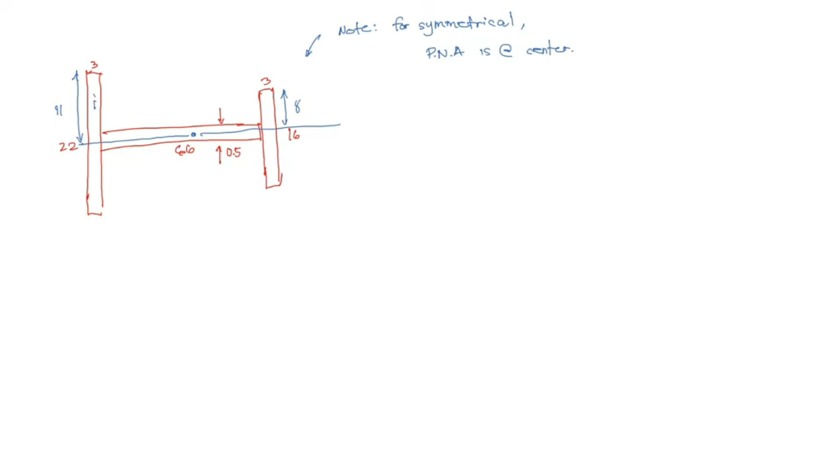So in that case, we just have to take the moment about the plastic neutral axis at the center. Let's divide it into two areas. So this is 22 over 2, that is 11. This one, 16 over 2, that is 8. So 11 and 8. Let's say this is area 1, this is area 2, and this is area 3.

For area 1, that will be ZY. ZY is equal to area top times Y top plus area bottom times Y bottom. Our area top, that is 11 times 3, Y top is 11 times 3 times 11 over 2. That's area 1, plus area 2, that is 8 times 3 times 8 over 2, plus area 3, that is 66.

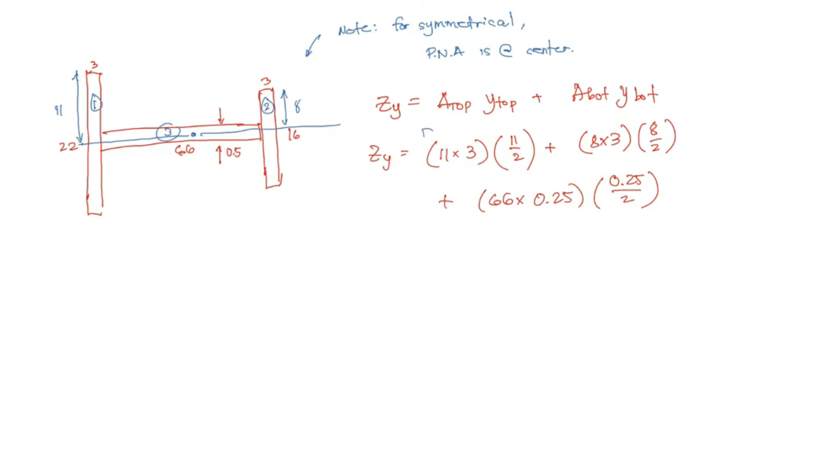66 times 0.25, half of 0.5, times 0.25 over 2. And then, since top is equal to bottom, I just multiply this by 2. So what is my ZY? 559.125 cubic inches. There.

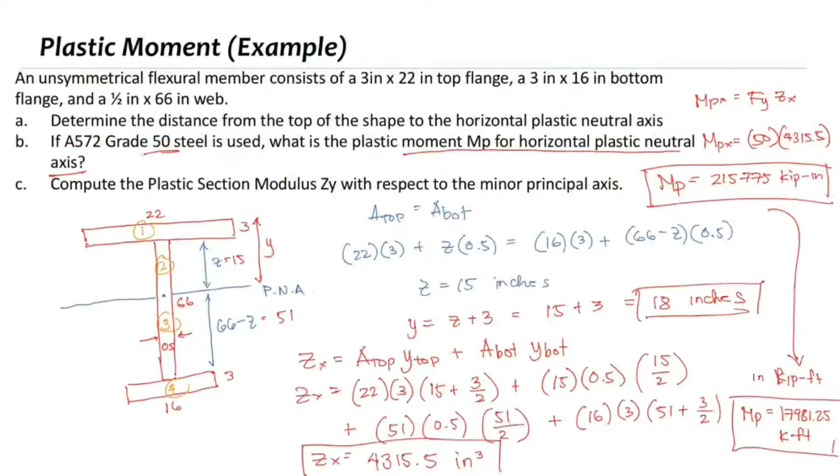So it's possible that about the major axis, it's unsymmetrical, but about the minor axis, it's symmetrical. So as long as you can fold it, it's symmetrical. Okay.

We can also calculate the plastic moment for a standard section, especially when our Zx is given. Let's say, for example, compute the plastic moment for W10 by 60 using A992 steel. So our Zx is given, the Zx is given as 1222 for W10 by 60.

So for A992, our Fy is equal to 345 megapascal. So to solve for the plastic moment, MP, that is just Fy times Zx. So plastic moment, Fy 345 times Zx, that is 1222 times 10 raised to 3.

We can now calculate for the plastic moment. Divide by 10 raised to 6 to make it kilonewton meter. 421.59 kilonewton meter. So if the plastic section modulus is given, then we can easily calculate for the plastic moment.